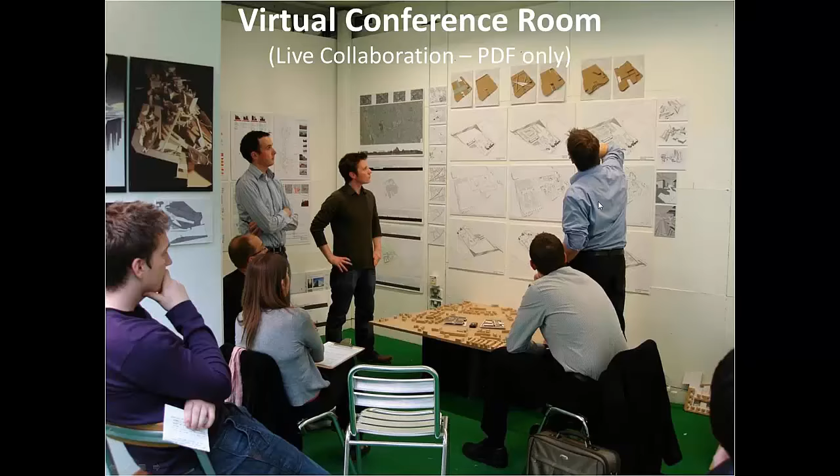Or we can leave the studio session, and the documents that are part of it remain there, so people can come and go as they please and make comments and markups on various documents. It doesn't matter whether we're meeting interactively together or doing it asynchronously - whoever said what, and when, to any of these documents is captured, tracked, and made part of the PDF for future use.

Just a brief summary of some of the markup tools available: there are obvious things like placing text, using pens and highlighters. You can place clouds, and what they call call-outs, which are clouds with notes associated with them.

You can establish stamps like 'release for construction,' 'not to scale,' whatever you want - you can create a stamp for that.

There are powerful measurement tools, so if you open a PDF document that has dimensions drawn on it but wasn't plotted to scale, you can calibrate a scale by clicking on the document and saying between here and here is 15 feet. It will remember that as you do square footage calculations, perimeter measurements, or area measurements. You can even add a Z depth to do volume calculations in addition to area calculations.

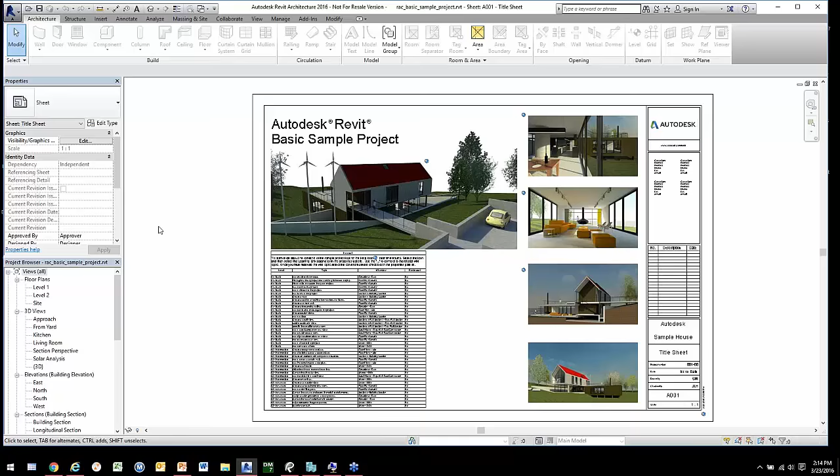So in here, what I'm going to do is go to the 3D view and show you one of the first integrations with Bluebeam and Revit, and that is the ability to extract a 3D model as a 3D model. In here, if I go to add-ins, all I have to do to create a 3D PDF of this is simply go to the pull-down menu and say create a 3D PDF.

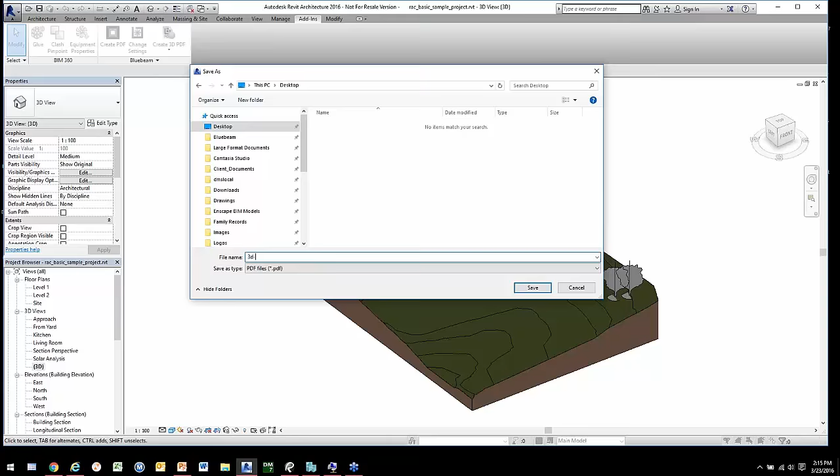It's going to ask where do you want to put it. For my purposes here, I'm just going to shove it on my desktop for now, and I'll say that this is going to be a 3D model, and I will generate a PDF of that.

Now, this is a true PDF. It could be sent to anybody, but it is being written to my desktop as we speak right now.

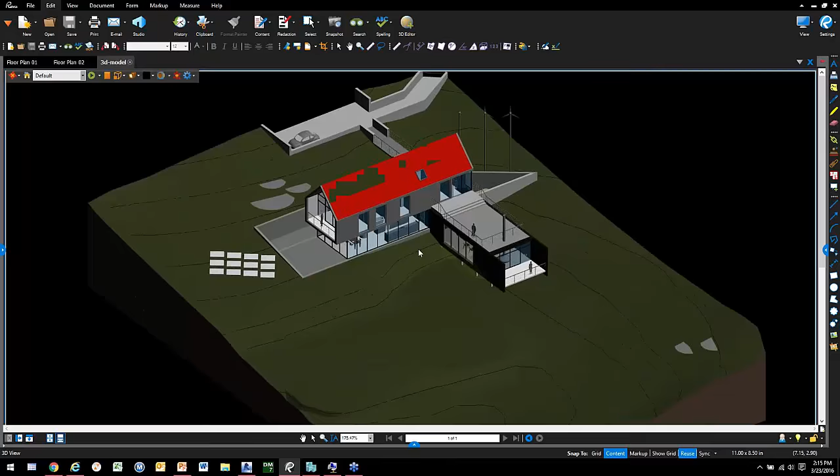Now, I've done some testing with this, and just for your information, what I've seen as a general result is this 3D PDF is roughly 25% of the size of the original RVT file. It is fully rotatable, as you can see here—I'm spinning this thing around in and out and zooming in and so on.

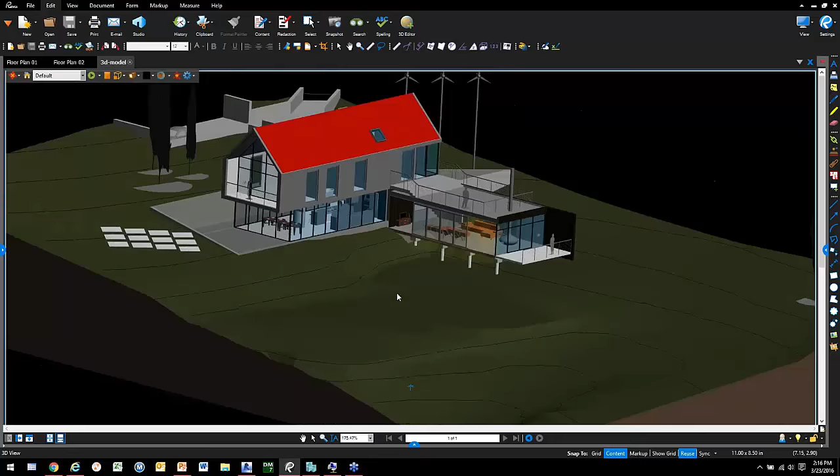It also has capabilities like, for example, I can click on any of these objects, right-click, and say I'd like to hide that object, so that as I'm zooming in and out or trying to see inside of the model, I can very selectively choose what it is that I'm after. It also has the capability—I'll zoom out a little further here—to do things like cutting planes.

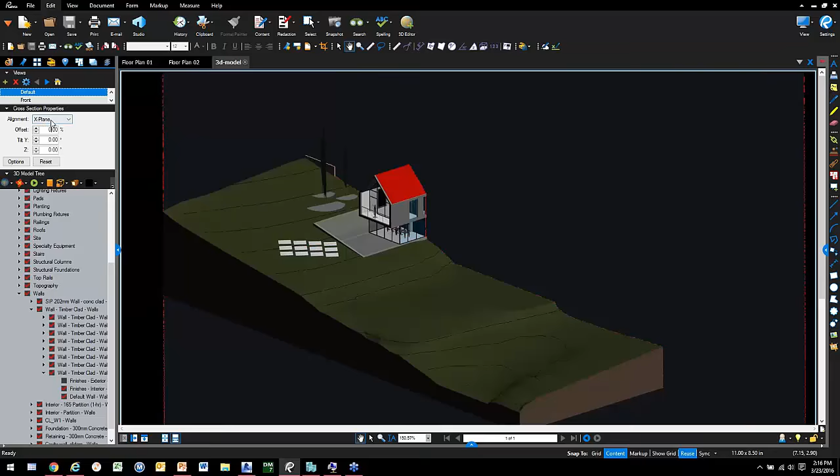What I'm going to do is turn on the cross-section properties, and you see it automatically goes to a Z value plane, and then I can move that up or down depending on where I want to cut through the building, or I could change it to an X plane or a Y plane, or do what they call X flipped, so you can see it the other way around, continuing to cut these cross-sections through it.

Any one of these images you see here, you would be able to right-click on and say you'd like to do a captured image of that, say perhaps you want to email a graphic of that.

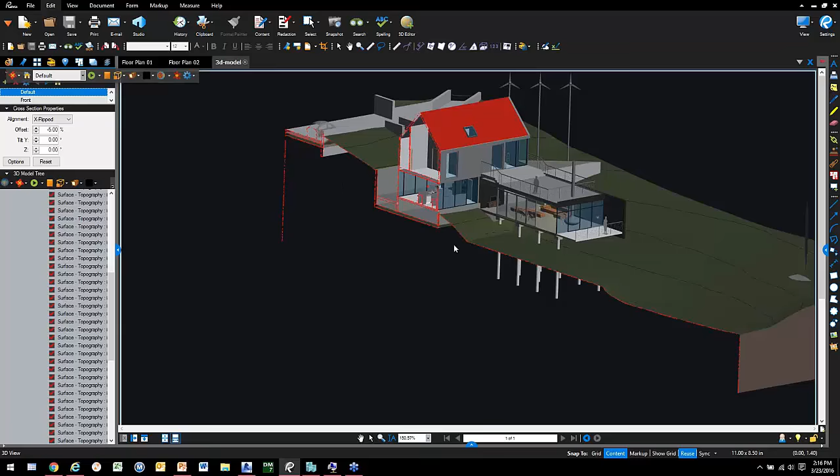You can also, though a lot of people are unaware of this, mark up a 3D model using these utilities. So let's say there's something about this brown ottoman here — I can place a cloud around that, place some text associated with it, and say 'replace with leather,' for example. Now that markup is part of this 3D model.

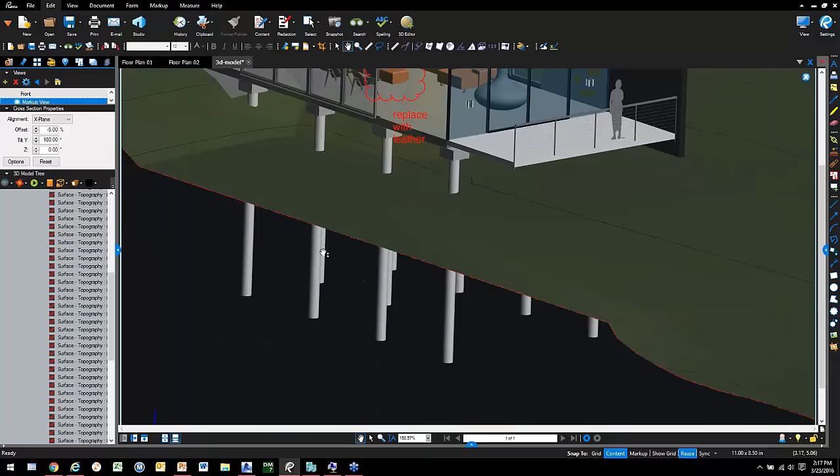So if I go back to the standard view and turn off, say, the cross sections and so on, notice how my markup — if I zoom in and out or rotate around — becomes this magenta sphere, and there could be many of those throughout the model.

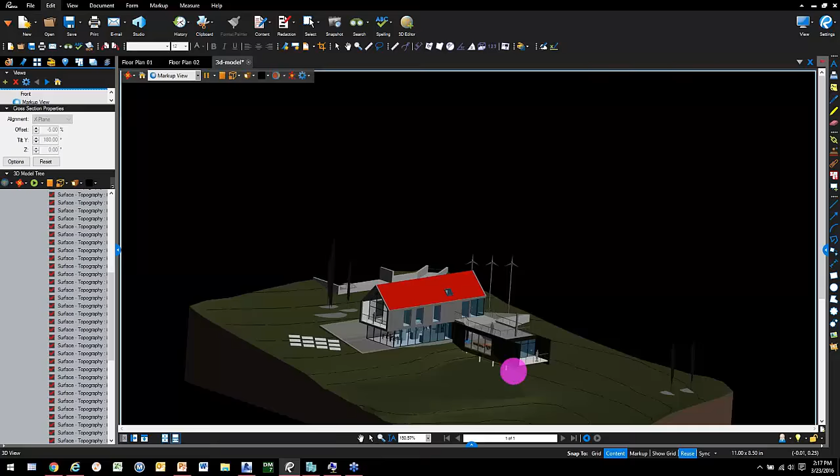The way Bluebeam Revu works with this 3D model capability is that if you click on the sphere, it automatically remembers the view orientation and all the view settings that were enabled when that markup was created, and it will automatically reorient the model so attention is drawn exactly to the comment that was there.

And like any other markup, it's listed in the markup list as to who placed which comment and when it was done, and there's a whole series of variables you can associate with it to do material takeoffs, responsibility lists, and so on.

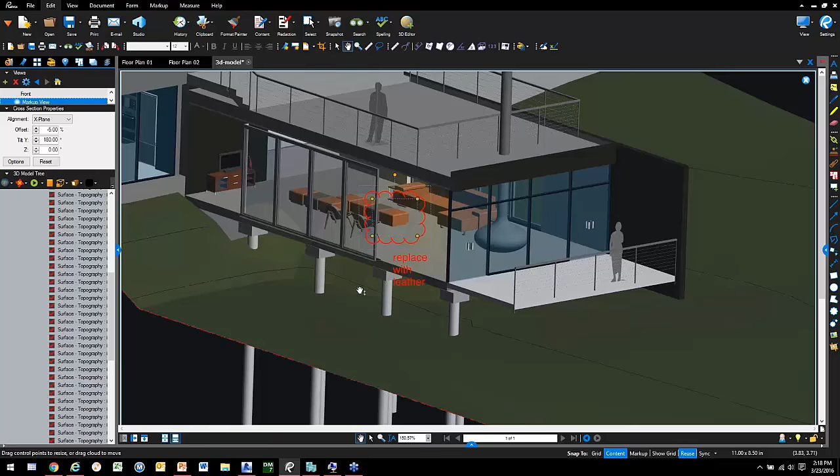But that's just one example, and I'm not even going to keep this 3D model — I'm just going to kill it here. Would you like to save it? No. And this is a floor plan that's already open in Revu.

Now I'm going to go into another model in Revit. First, I'm going to pop over here and just kill the entire session. This drawing here came from a Revit model, but instead of dumping a 3D model, I went to the floor plan view.

I said I'd like to extract one of these floor plans, and then from there, I began to mark it up with rooming lists and punch list symbols.

And if you're using the iPad version, or even the desktop version, if you've captured photographs that are on your hard drive or accessible to you, when doing your comments and markups, you can also include graphics. In this case, the punch list noted a wall tape joint visible that needed further work.

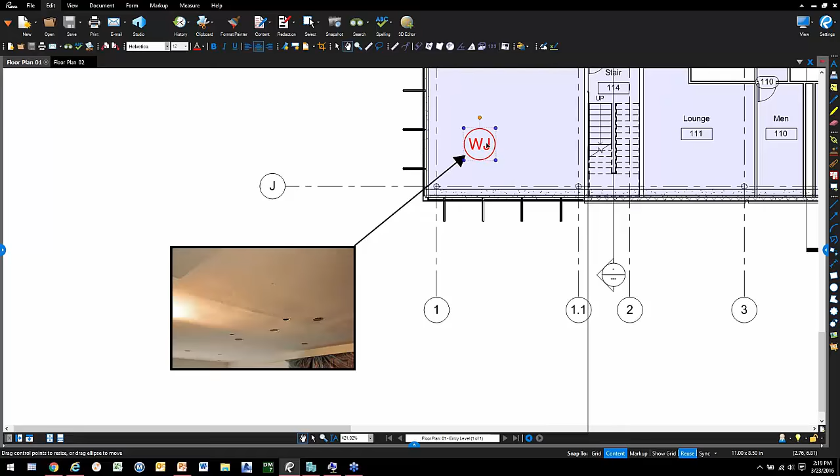If I go to the properties of that markup, it's been assigned to a contractor called Johnson's Drywall, and I've even included a graphic photograph of the problem that I need this particular contractor to deal with. And again, this is a standard PDF that can be shared with anyone.

So if I chose to, I could simply say let's email this to whomever, and I can go into my distribution list and contact list and say I want to send this out to Johnson's Drywall.

But more likely, what I'd want to do is have my email say something like, hey Randy, we need to talk about this tomorrow at 2 o'clock — meet me online in one of our studio sessions, and let's talk about it interactively and decide what to do about that, and we'll do that in just a minute.

The other thing I wanted to do was show you how I generated these floor plans from a Revit model, and how easily you could do it as well. So I'm going back to Revit — I'm going to minimize Revu, go back to Revit, and tell it to open a different RVT file.

Now, while it's doing that, I am going to pop up my browser here that's already running in the background, and I'm going to point it to a URL — let me cut and paste that in there for you.

Just for your information, this is a website I went to when I wanted to grab some 3D Revit models. I searched for sample project files and found this one called Enscape. They specialize in visualization for Revit models, but they also have downloadable project files at www.enscape3d.com/Revit-sample-project, with 2 or 3 Revit models you could download if you're interested in experimenting with exactly what I'm doing in this video.

Now in this RVT file, there are already rooms established. It knows that this is Office Space 321, this is Media Review Room 320, and so on. In the add-in from Revu, there's going to be an error message here just saying my plotter... oh, actually it didn't do it that time. Typically it tells me my printer is not capable of printing a 3D model, but I guess I've got that turned off.

If I do that, for example, what I could do in Revu, over in one of these already extracted floor plans, is come into the Spaces viewer. Instead of looking at pages or other documents, I can go into the spaces for this floor plan, choose any one of those spaces, and manually create an area measurement. I could do that again and again for any of the various rooms, spaces, or zones I'm interested in that came from that Revit model.

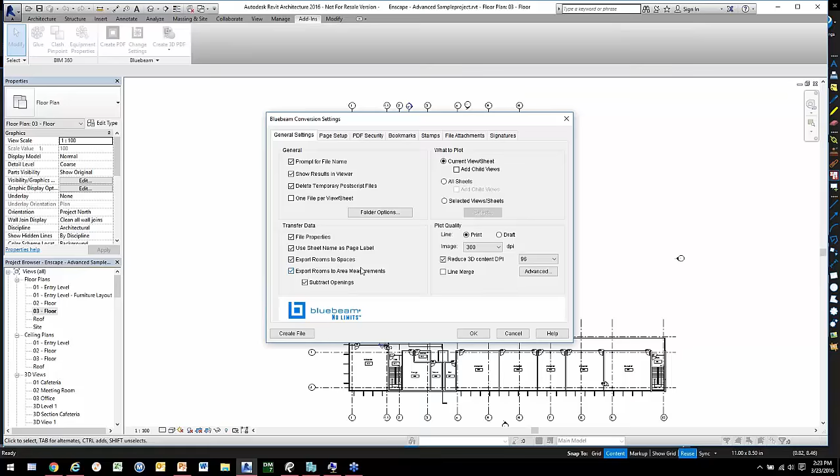Or you can have it done automatically, which is what I'm doing here. I'm saying not only bring over the rooms as spaces, but also do area calculations at the same time. So I'm now going to create a PDF of this - it already knows I've done others from this model and where I put them, so it's simply asking where I want to put this one. I'll put it down here and call it floor plan 3, which we're doing live. Now it's going to process that and create a 2D PDF of the floor plan with all the necessary information.

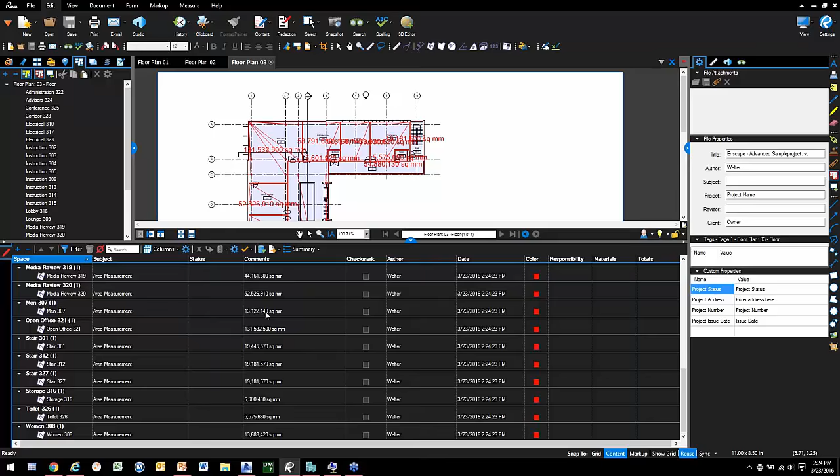Now, as you can see, it's already done the area calculations, and if I scroll into here, for every room there is an area measurement. It knows this is a metric version of the model working in millimeters - obviously, you can put it in whatever units you want.

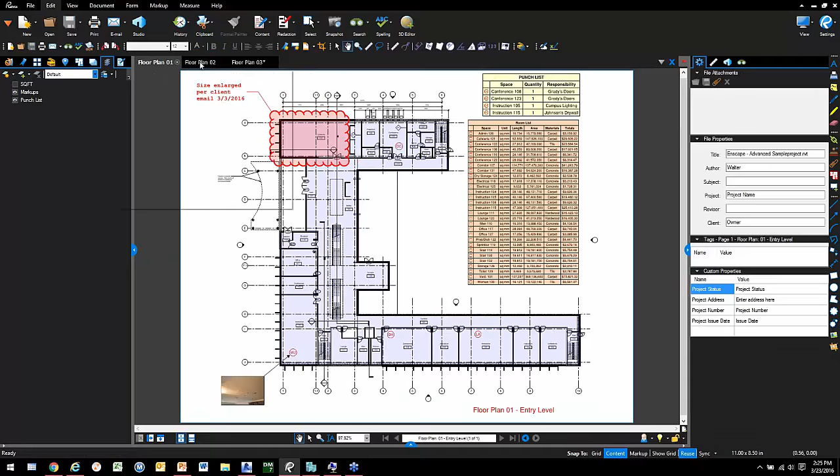But I don't want to see those area measurements, so what I'm going to do is a lasso - I'll grab all of those area measurements and create a new layer to get them onto. I'll call it square footage, or whatever you want. Then under the layer window, I can choose what I want to see or not see at any given time.

Over in the floor plan for level 1 and level 2, I've already placed a room list and created this legend inside the file itself. That's one of many things you can do, and we're going to do that live in just a second. Another thing you could do, if you needed to run a report of this wing's square footage calculations and rooms, is - in addition to popping up a legend - create a summary report in either CSV, XML, or PDF.

There are various formats you can export to. I'm going to go to CSV. I'm not going to bother modifying any of the standard columns, although all of that can be configured. I'm simply going to dump these selected area measurements into a comma-separated file.

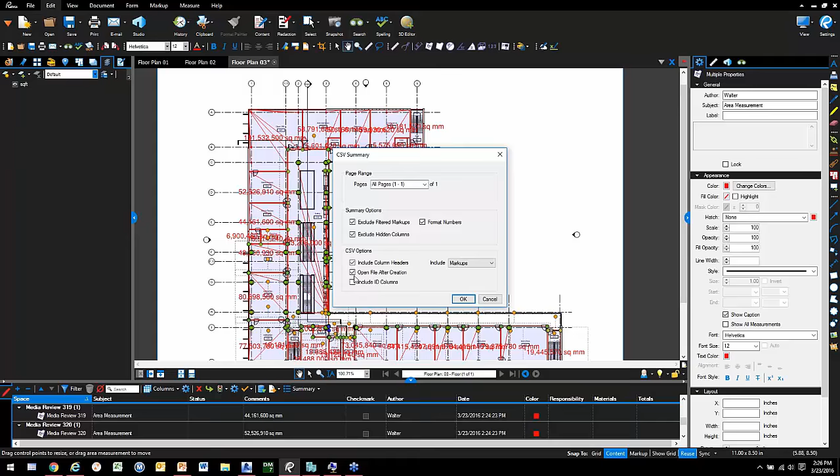It'll ask me to verify various choices available to me. Again, I'm going to dump it on the desktop. It's creating floor plan 3 CSV, and as soon as it's done, it opens up in Microsoft Excel. Then I can take any column, any piece of information, sort it, change the column order, add additional information, and do whatever I want to this report before I save the file and share it with management or whoever needs it.

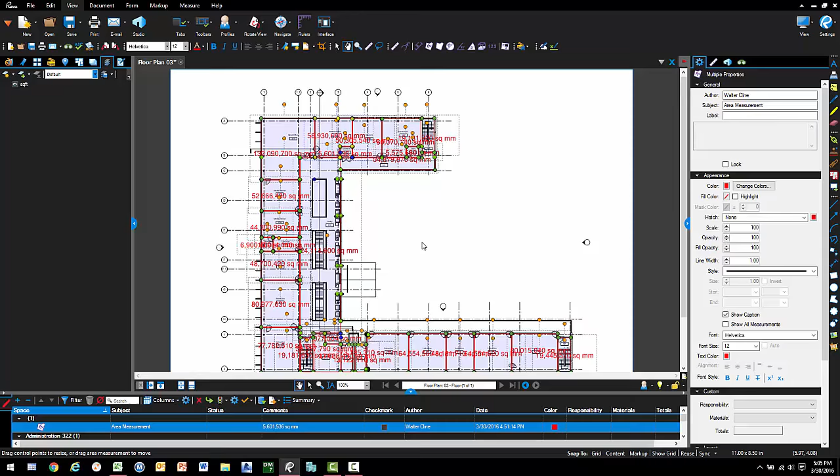In those other documents, I have already placed these rooming lists, and there's a series of things in Revu that you can save, any kind of markup that you do as you're doing it.

Let's say I place a cloud from here to here. That cloud is now stored in my recent tools, and I can choose to use it again, place a different shape of it, or double click on it to place an exact copy of that cloud. You can do that with any markup you're putting into the drawing. This rooming list is a markup like any other, and I have stored it into one of these tool sets for use later on.

So what I can do is simply say I'd like a rooming list here, and you'll see it comes in as the original graphic that I saved, but when I click and let go, it's waiting to be associated with the spaces and rooms of this drawing as opposed to where it was generated.

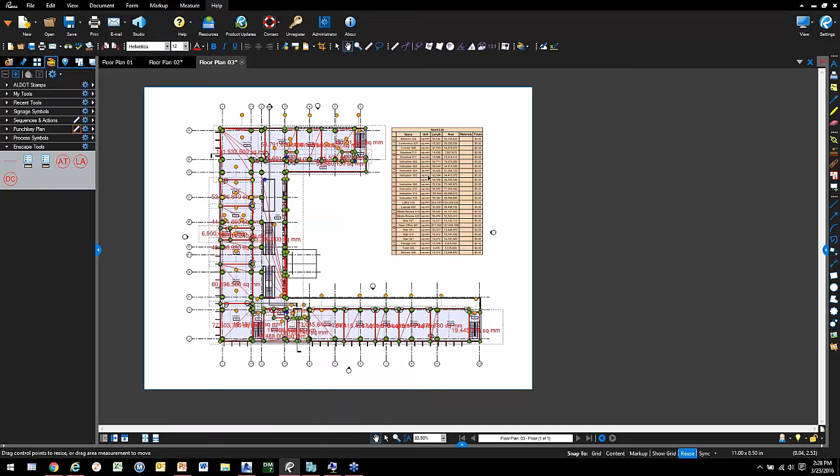So again, I'll use the lasso tool and come down here and grab all of these rooms, and when they're highlighted, I'll right click and tell it I'd like them associated with that rooming list legend. Now this has been updated to have all of the information from this file as opposed to the original from where it came.

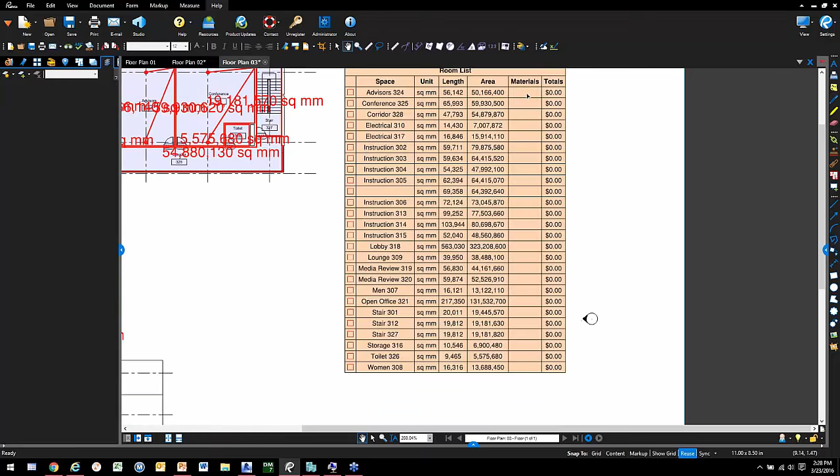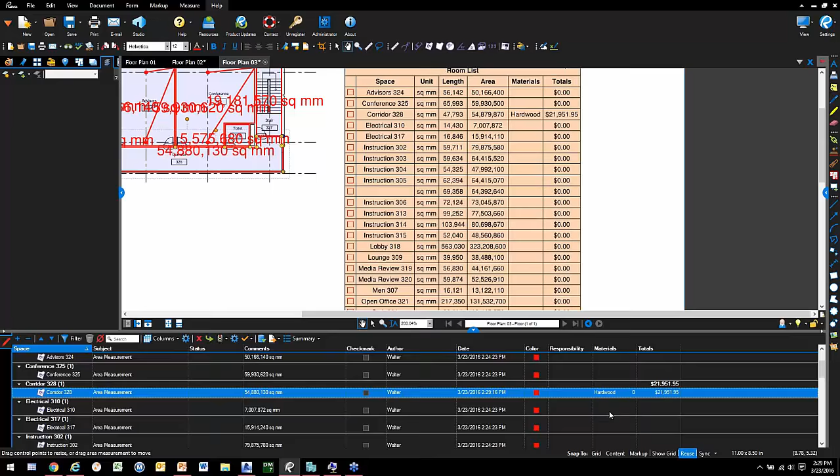Now here you should notice - I'm going to zoom in over here - some of the materials and totals are blanked out, whereas they were filled in in the other documents. That's because somebody went through, collectively or selectively, and specified that this corridor 328 is based on hardwood, this corridor is based on tile, and this electrical room's flooring is based on concrete. Each of those materials has a value associated with it.

So as you're telling it the material type, it's automatically adjusting your rooming list or room schedule to have the length, area, materials, totals, and so on, all of which is modifiable by selecting the legend and going to its document properties and changing the properties there.

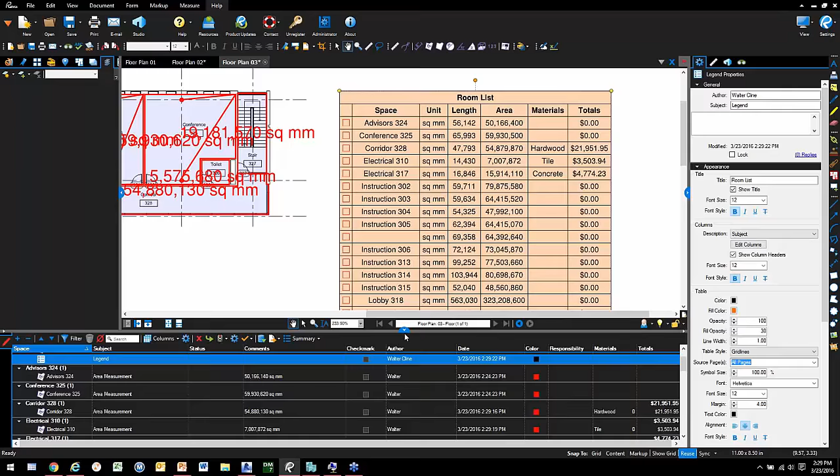In addition to that, I'm going to real quickly move on to the studio session stuff. Here I'm going to quickly put these on a new layer. When Revu got confused previously, it lost that layer I had done before, so we're just getting that out of the way.

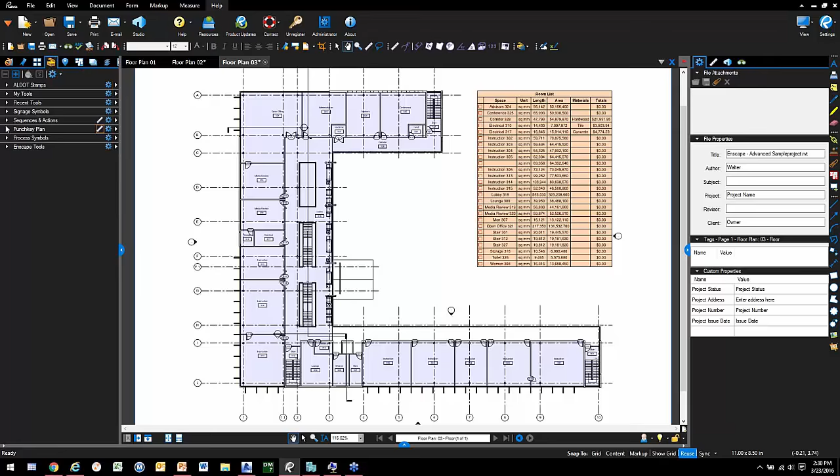Now let's say I want to use these tool sets here to do some markup, some punch list type activities, like the door closer in this particular room is not working properly, and the door closer in this room, and this room, or we have another one of those taped wall joints over here, and over here, and over here, that need to be corrected as well.

Well, I have more than one legend template. I've created a legend template here for punch list, and now I would simply do the same thing I did with the room list - select the various punch list symbols and tell it I'd like them associated with the punch list legend that's on the drawing.

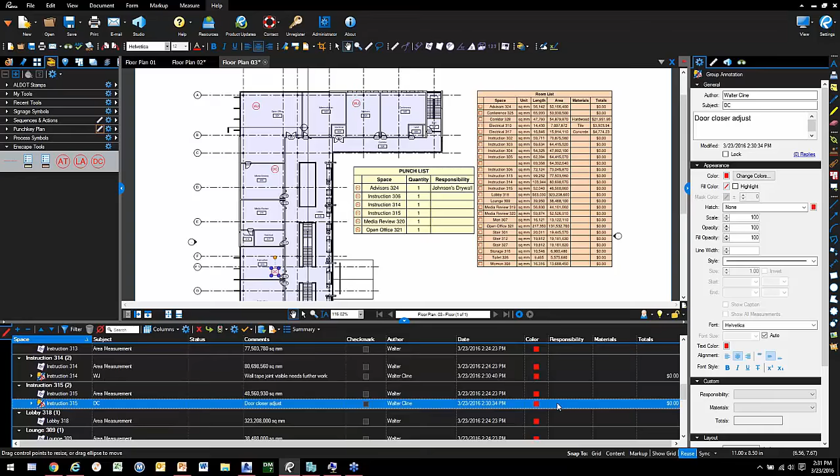Again, totally configurable. From here, I can go into the markups and begin to assign responsibilities. This is a wall tape problem, so that's going to go to Johnson's Drywall. If I scroll down, we'll see the various other ones that are here. In this case, this is a door adjuster that needs to be corrected, so we'll assign that to Grady's door, and so on and so forth.

It will also, if I continue to add punch lists, now that the two are associated together, it will continue to update. If I put two door closer punch list symbols inside of the same room, it would do a cumulative quantity. So it would say within this room there are two of these things that need to be addressed by Grady's doors, and so on. It's a really neat feature of taking things out of Revit and bringing them into Revu in order to do these types of calculations and activities.

Now let's see, I do have some more questions. Let me click on those. Okay, I will be covering, for the questions I'm seeing here, I will be covering that in just a moment, so I will address it at that time.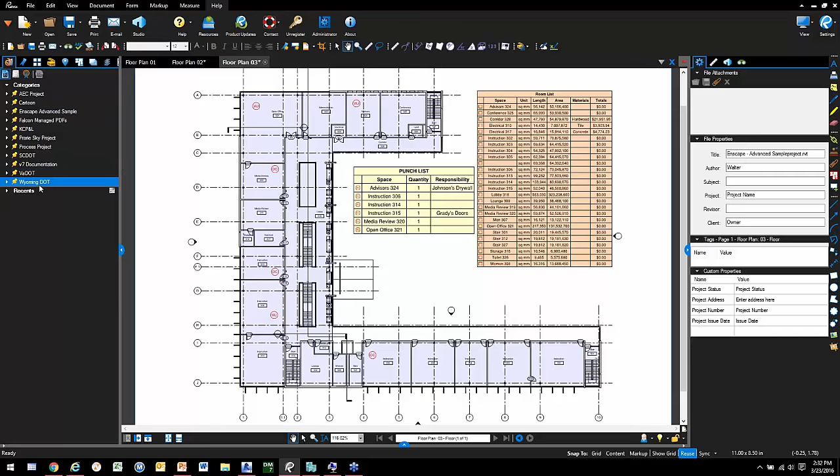All right. Now, some of the other things you can do here—I'm going to go into a series of pinned project locators where you can easily regain access to projects that you've already been working on. I don't need floor 3. I'm not going to bother to save it, or floor 2, or floor 1. I'm going on to a completely new project here.

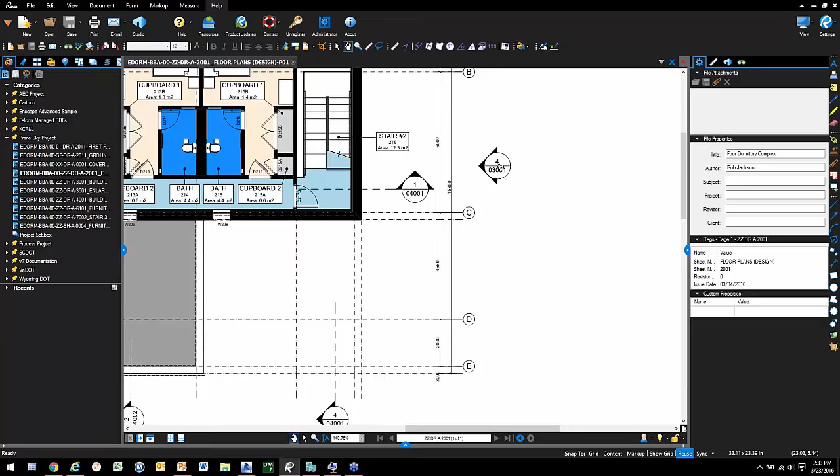This is also a project that I downloaded, and it came with a series of floor plans and a series of elevations and sections and 3D, 2D PDFs of 3D images and so on. Using the markup utility called Auto Hyperlink, I told it to look everywhere that there was an elevation or section detail with a value of 04001.

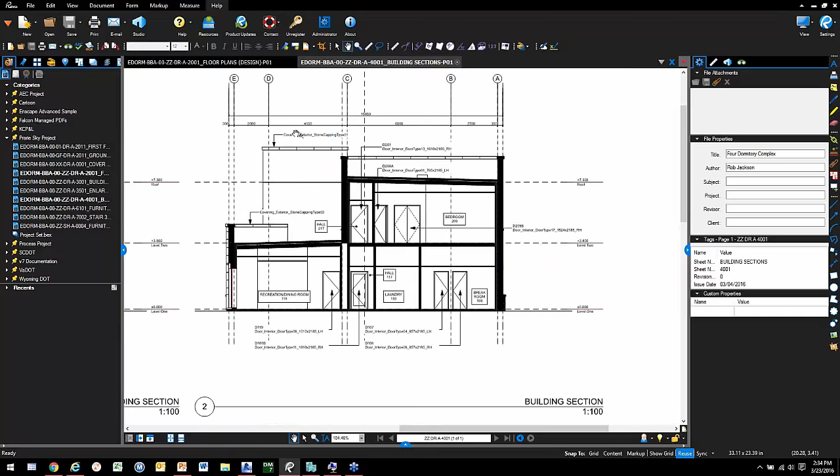What it built into the PDF automatically are these hyperlinks, so that if I click on that detail or elevation link, it will not only take me to the correct document, it'll take me to the correct elevation within that document. This document has elevations 1, 2, 3, and 4. The one I just clicked on was obviously 4. But if I slide in over here a little closer, you'll see that this is section number 2, so it goes to building section number 2. And if I come back over here and say I'd like section number 1, it's the same document, but it's now changed its view to section number 1 and so on. So those hyperlinks are really valuable capabilities there.

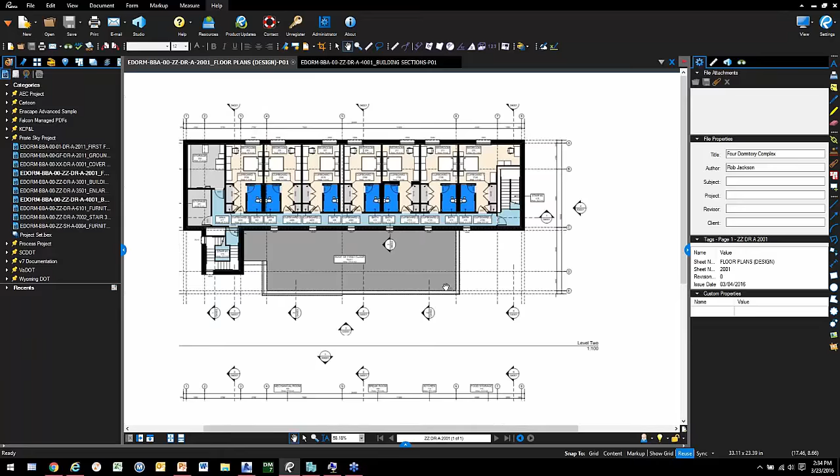You can manually put in your own. I've pasted a hyperlink here that says if I click on that piece of text, take me to whatever that stair detail is. So those are some of the various things you can do there.

Now, some of the other things you can do that I think are really valuable is you can build your own tool lists here, not just from markups, but from content from the drawing itself. Let's say this chair here—I think we need more of those in other rooms. One of the things you can do is go to Edit and do what's called a snapshot. With this snapshot going, I'll simply click and place a rectangle around that object, and it has now extracted a copy of that object that I could then paste back in wherever I want.

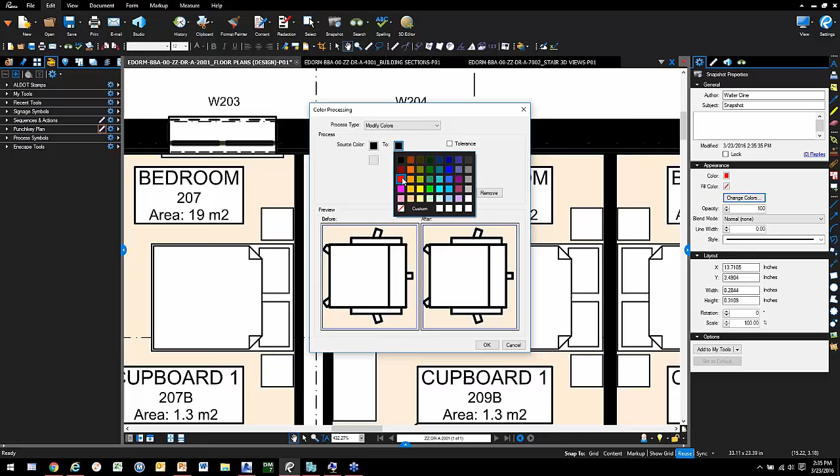Now, I don't want to place copies of it exactly, because if I generated this from a Revit model, I want to be able to tell the difference between the ones I extracted and the ones added automatically. So one of the things you can do is, while it's selected as a markup image, change the color. I'll say I want the black part of this to become red, and I could remove various things, but red is good enough. Then I can add this to any of these tool sets over here.

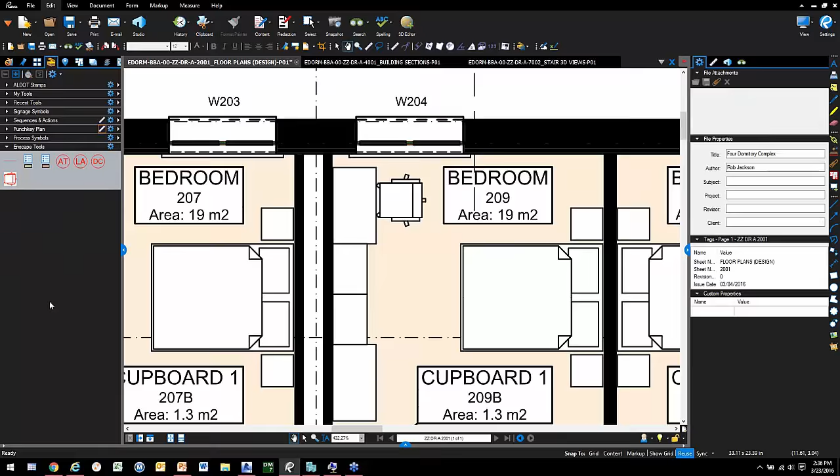So if I right click and say I'd like to add that to my Enscape tool set, now what I have, in addition to what I had before, is an instance of this chair. I can kill it, and from here I can change various attributes about it and so on.

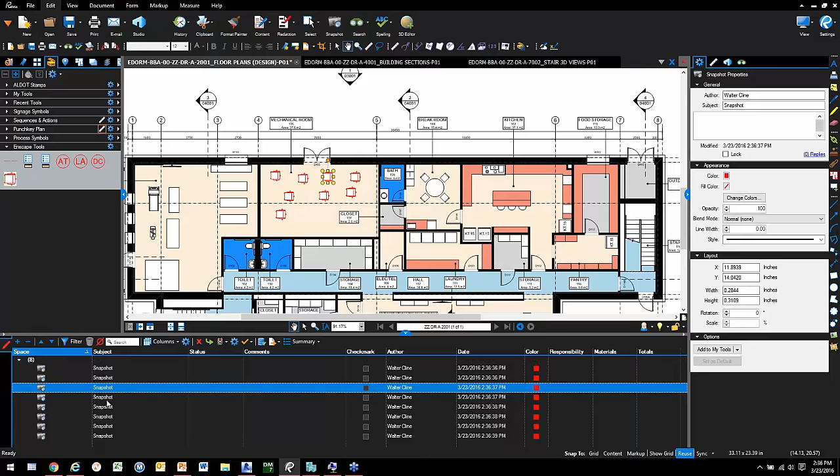But I can use that symbol later on. I can come in and say that in this area here, I think we need 6 of these. Now the beauty of that is, when I come to my markup list, those are also there—right now it's just taking the default value of snapshot, but we could change any of these column subjects, status, comments and responsibilities, and all of that would be up to date with these additional items we put in.

In fact, some people who use MicroStation with Revu—MicroStation has the ability to plot a cell library, in essence to create a drawing that has all the symbols from a cell library, what they call cells, and that can be plotted to PDF and brought into Revu. You can very rapidly recreate an entire cell library of MicroStation symbols inside a Revu tool set.

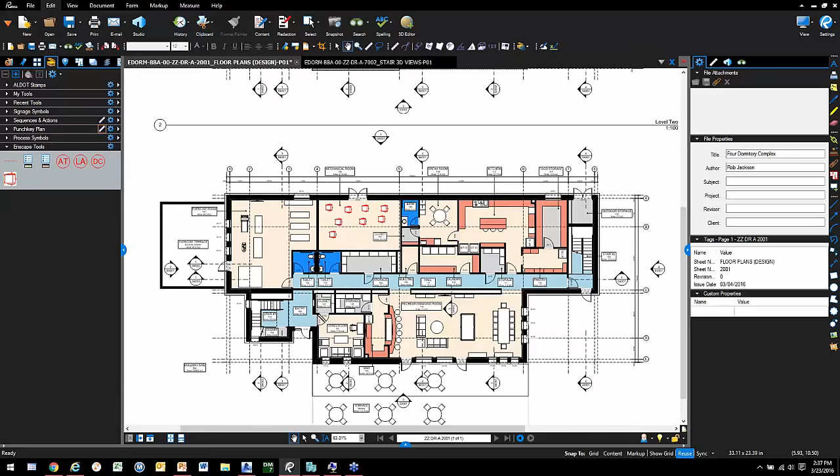But ultimately, what we're trying to get here is to communicate this information with other people. So what I'm going to do is take the stair detail and this floor plan, and go open one of these cloud-based collaborative sessions.

To do that, you simply go here and connect to the cloud server. Now the cloud server I'm using is the Bluebeam corporate public cloud server, and it's available for anybody who has Revu to take advantage of it.

However, if your company or agency or school would like to have their own behind-the-firewall cloud capabilities for specific people, you can do that as well. I'm simply using the one that is provided out of the box.

Now, as you can see, I've already got various sessions running. I've got multiple projects active, and what I'm going to do is just start a new studio session that I can allow people to come in and collaborate with me.

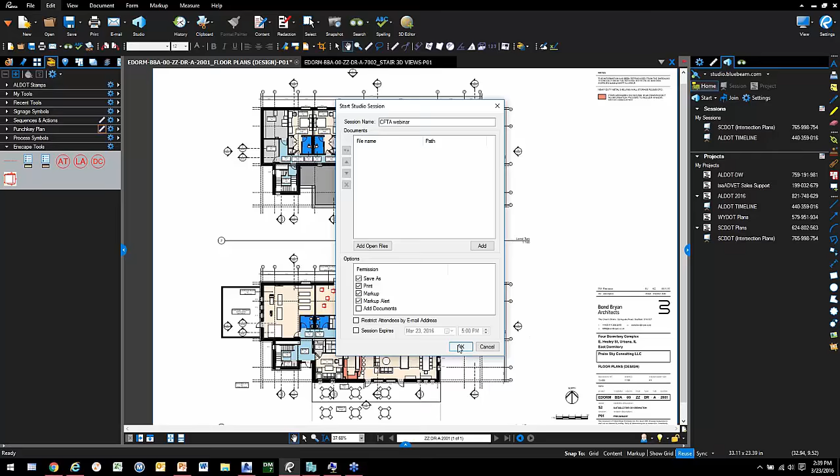So I'll call this session CFTA webinar, and typically you would restrict access to only invited people, but I'm going to open it wide open right now so that anybody who wishes to join this session, whether they have Revu or Vu, all they need to interactively participate is this session ID.

Now what I'm going to do is take this document and save the chair changes that we did, and tell it I'd like to open that into our studio session. In essence, I just pinned it on the wall in that virtual conference room so that anybody can see it and anybody can comment on it and mark up on it, as long as they have access to the studio session.

And I'm going to do the same thing with this stair detail. I'm going to bring that over and make it accessible to anyone as well.

Alright, now, if you'll bear with me just one second, I'm going to let a couple of people log in online and collaborate with me on these particular documents.

So what I'm doing is I grabbed a laptop computer, and I also have an iPad running over here. I have Vu on one of them and Revu on the other, and I'm simply going to go online through one of these other machines.

Now this could be a user in any city, anywhere on the planet, or even on a plane somewhere between cities, and all they have to do is say they want to join this session and key in the ID, which is 765 866 218.

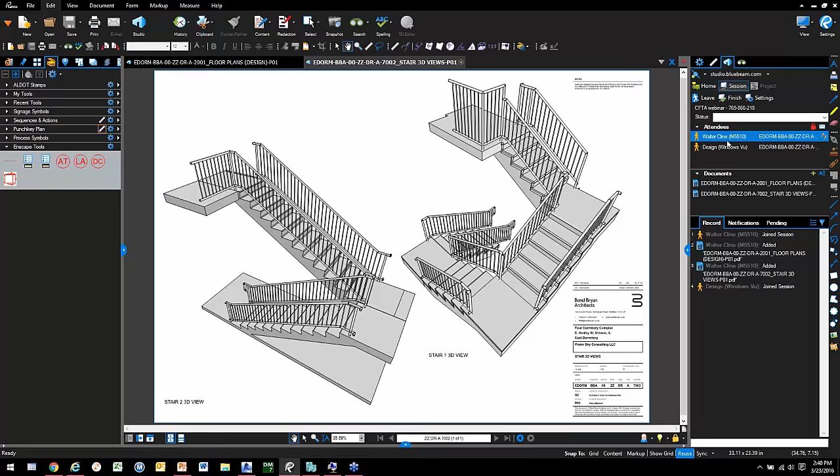As soon as they do so—here, we'll click on that—you'll be able to see that not only am I participating in this studio session, so is somebody else, and what that person is using is just Vu on a desktop. But because they are connected to our studio session, it inherits the capabilities, and they're able to participate.

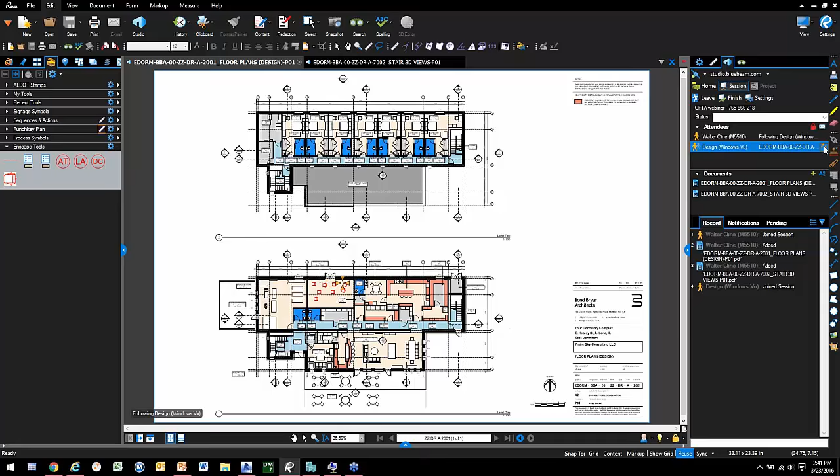So what I just did is click on those orange feet, which tells Revu that we'd like to follow the person in the field that we're communicating with. I'm not doing that on my machine, they are, and I can follow them around, which gives me the ability to see any markups they choose to put inside the drawing.

So there they placed a cloud, and here they placed a red circle around that for some reason. They can even grab one of their markups they really want to draw my attention to, and say they want to alert another attendee. When they hit OK, my notifications section flashes, indicating this person has placed that red line and really wants me to pay attention to it.

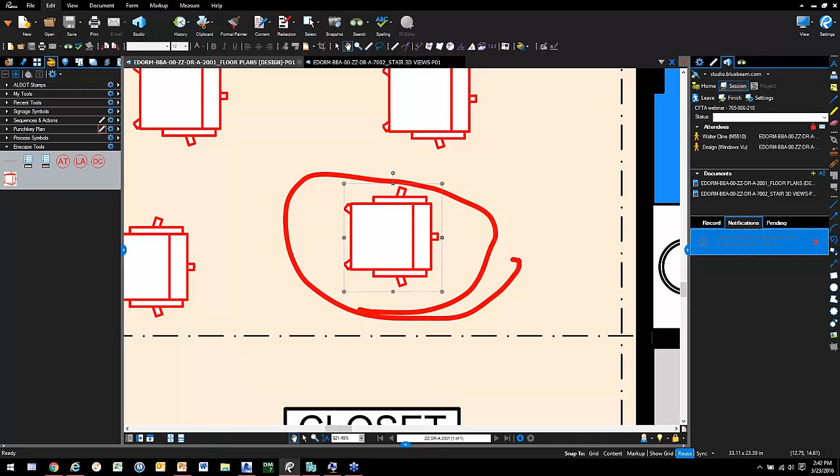We can be on the phone talking to each other, doing this interactively or in an asynchronous way. If I disagree with whatever comments they put on there, I cannot change this person's markup, because when we're in a studio session, what he or she said is sacred, and what I say is sacred, and we're kept away from each other. However, I can grab any of their markups and reply to it, saying I disagree for these reasons, let's discuss next Friday, and so on.

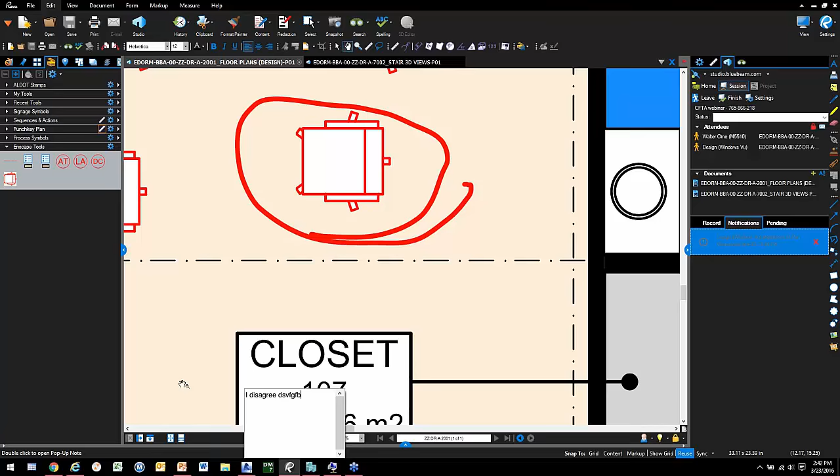Now here, as I go into the markup history, it knows that person placed that cloud and that person placed that callout, but it also knows that I placed a reply saying that I disagree, for whatever reasons.

Now this could continue for weeks, or it can continue for a few hours. You can put a deadline where the online session ends next Thursday at noon. There's all kinds of things you can do inside of this.

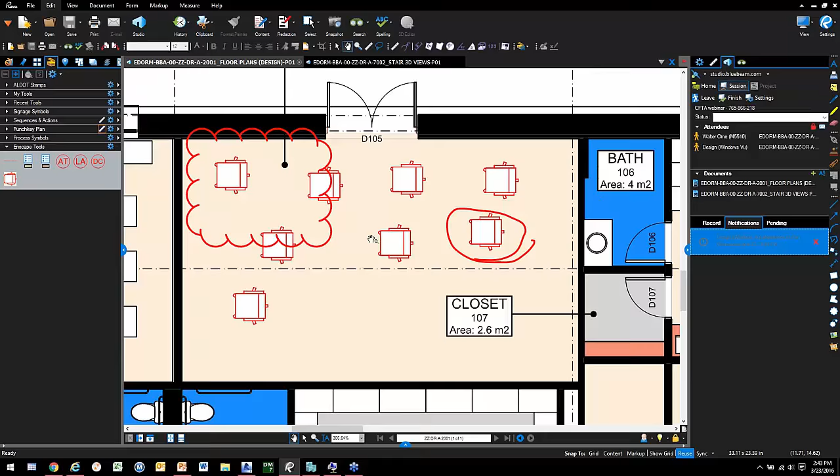But let's say we're happy with the comments we've done so far. The person hosting the session can at any time decide to finish it and decide what to do with the markups. Here, what I'm going to tell it to do is take these new markups and just put them out on my desktop, instead of overwriting or not saving the changes at all.

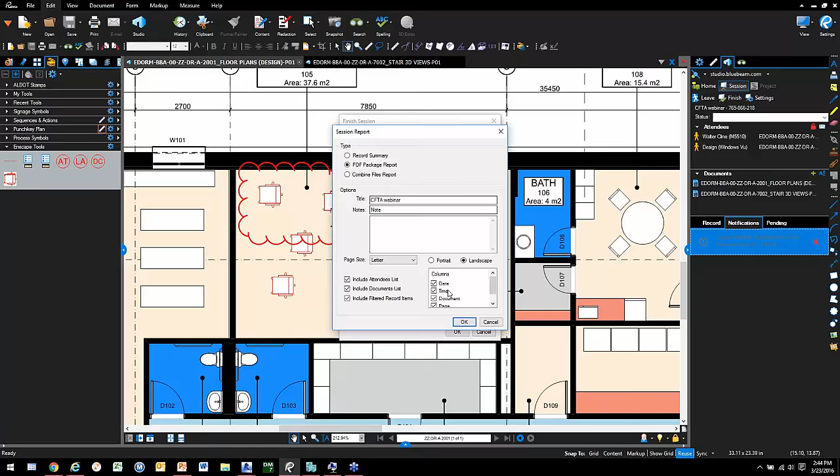Another thing I want to do is create a summary report which shows me who did what when, and I'll say I want to create a PDF package version of that, and hit OK.

Now the session is being closed, and anybody who was online has now been notified that these files have been downloaded, and the session has ended. On my other computer, I've just now been kicked out of that session because it's simply no longer valid.

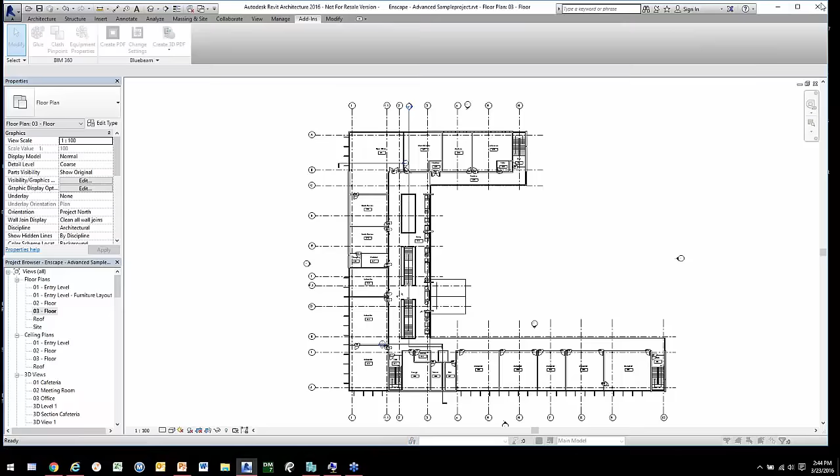Now this is what it created. I'll get out of Revit, which has been running in the background all this time. It created the 3D model I saved previously, and then put these new documents down here. If I double click on any one of them, that will open them back up in Revu.

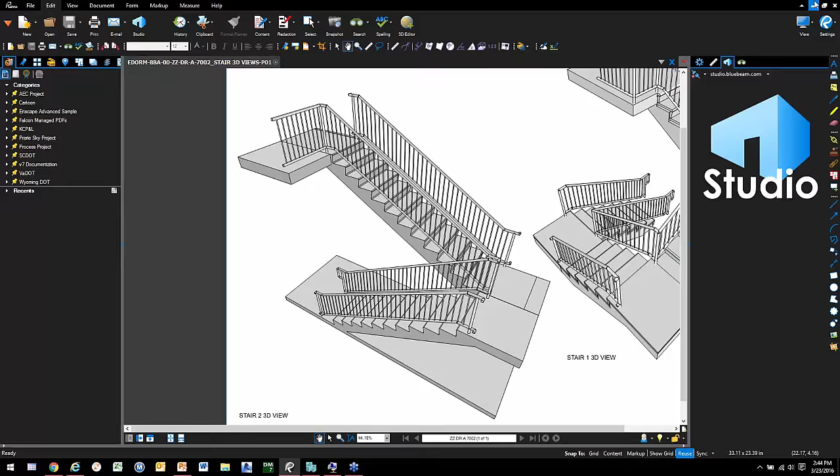We didn't really do any commenting on the stair, but if we go to the plans, we'll see down here that the cloud and the markup and the chairs and all those various things are there.

Now the last part of this was to round trip it to feed into a GIS system. There are lots of different ways of doing that. What I'm going to focus on here is how our customers using GIS would do it - highway departments, college campuses, utility companies, petrochemical companies, and so on - when they have a graphic map like this campus map here.

When they go to one of the objects and ask to know more about it, that's being fed by our document management system. That's a result here where I simply clicked on a building and said give me whatever you got. Here's one called Wistar Institute, and if I say give me every document you got, it tells me it has 8 documents, all TIFF files right now with various forms of metadata associated with them.

In that scenario, all you have to do to feed your GIS system is drag the document into the project folder and it will do it automatically. So what I'm going to do here is go to the University of Pennsylvania, down to the Wistar Institute project folder, where those 8 TIFF files are now, and take these 2 PDFs we've been working on. I'll just drag and drop them in there. It says you're going to move those there.

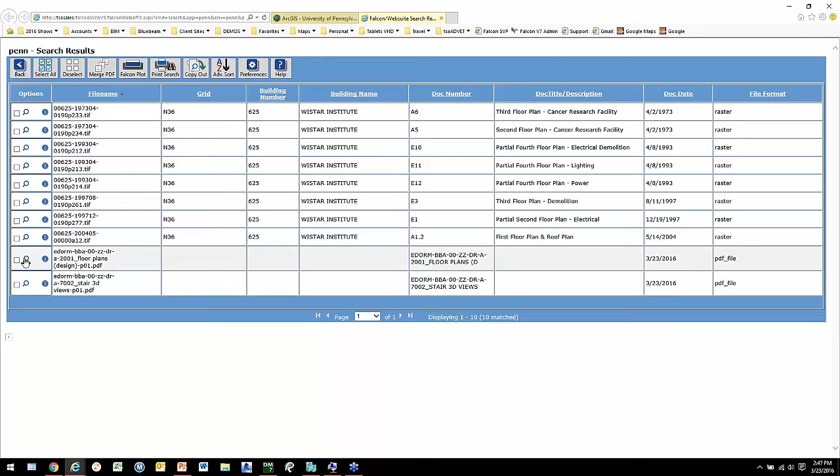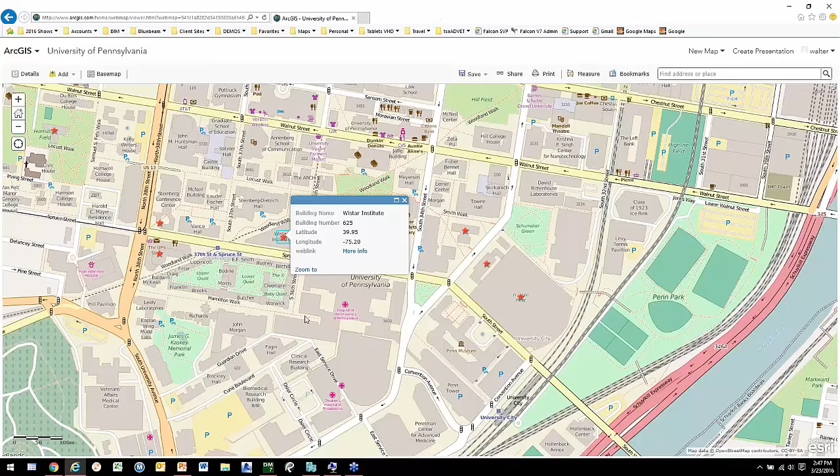If I now come back over here and choose the building and say, what do you have available, not only do I have the 8 TIFF documents that were there, but now I have these PDF documents that were modified and adjusted based on the studio session. If I click on that, it will open up again, and you'll see that all the information gathered and embedded into the PDF is instantly available to anyone who has access to that particular GIS map.

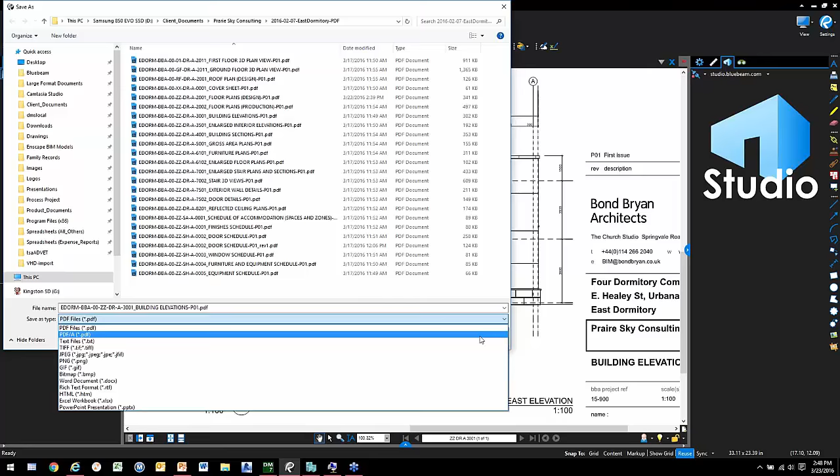Now I'm going to wrap this up and look at the Q&A list. One question is, can you also save out as a PDF-A, or archive PDF? The answer is absolutely you can. When you're working in Revu and you have a document open, say this one here, when you go to save, you could do a save as, and there's a whole slew of file format types, one of which is PDF-A. You can also take a PDF or information from a PDF and bring it into Word or Excel or other applications as well.

Another question is, which document management solutions work with Bluebeam Revu? Well, obviously we hope you'd use Falcon DMS, our engineering document management system, for that. However, it will also work with Bentley's ProjectWise, and even though we don't consider it a document management system, it interfaces pretty well with SharePoint, Microsoft SharePoint. There are no other document management systems that Bluebeam lists as compatible beyond those 3. That doesn't mean it won't work with others, it simply means it's not on their list of compatible solutions, and you'd need to test it with yours to see if it's indeed compatible.

Okay, I have 2:50, and I'm going to wait another maybe 2 minutes to see if anyone has any additional questions. At the end of those 2 minutes, if no one does, then I will end the webinar.